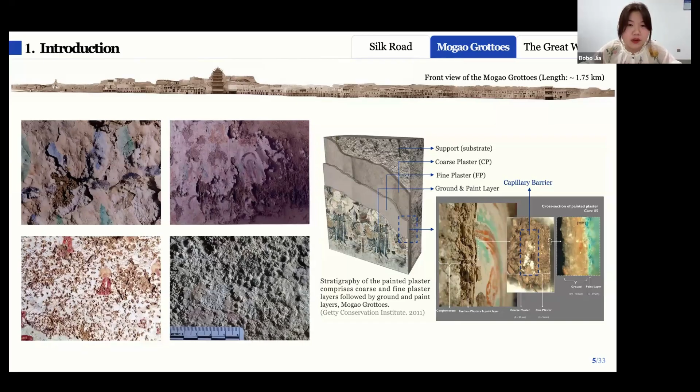As shown in the first row of figures, the surface becomes loose, which can lead to the detachment of the painting layer. Sodium chloride shows much smaller volume change. However, it is highly hygroscopic, meaning it can absorb moisture from the air, so it remains a serious threat to the paintings inside the caves. Here you can see the typical salt spots caused by sodium chloride.

And for the outdoor earthen heritage sites in this region, such as the Great Wall, salt deterioration also poses a serious threat. Here we can see the distribution of the Great Wall, which was listed as a UNESCO World Heritage Site in 1987. It extends for more than 21,000 kilometers along these red lines, crossing 3 main climate zones in China. It starts from the arid and semi-arid north, typical saline and alkaline regions in China and also my main research area, and extends to the more humid eastern regions.

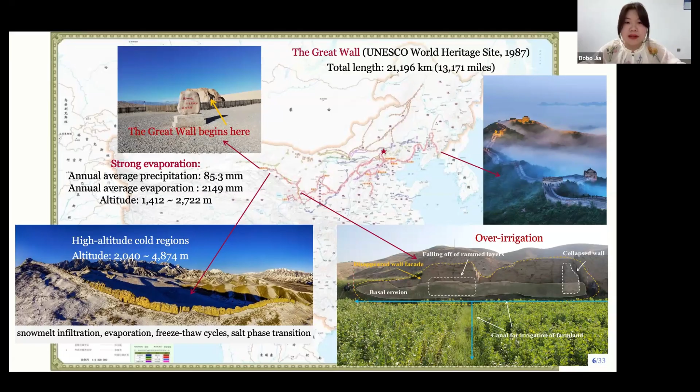And in some areas, the wall is surrounded by farmland. Why? Because to support the larger populations along the wide extent of the Great Wall, this situation is quite common. In some cases, over-irrigation occurs due to low rainfall and high evaporation. This further accelerates the upward migration and accumulation of salts from the foundation to the facades, leading to more severe basal erosion. So this slide shows a typical progressive deterioration.

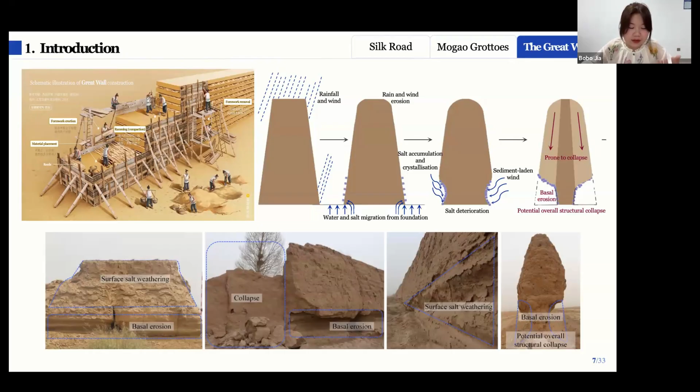Because the wall was built layer by layer, it is prone to detachment between layers, leading to basal erosion and even potential structural collapse. This process can become even more severe when combined with earthquakes or dynamic loading, such as vibrations induced by trains. And arriving at this point, we know that water and salt behavior within the pore structure of earthen heritage materials can progressively deteriorate the site.

So in my research, I try to understand this process from microstructure evolution to macroscopic behavior from a geotechnical perspective based on unsaturated soil mechanics. These figures show the soil water retention curve, SWRC, or some people also call it SWCC. Whatever, the SWRC describes the relationship between the water content of the soil and suction, or in other words, the capacity of the soil to retain water during drying.

So for an initially saturated soil, suction is low and mainly controlled by capillary effects. At the early stage of drying, the change in water content and suction is small. Once the suction reaches the air entry value, air starts to enter the pores to replace the water, and the water content decreases rapidly. This is the transition zone.

With further drying, the soil reaches the adsorption-dominated zone, where only a small amount of water remains, but suction becomes very high. And from the capillary theory, suction is related to the pore size. Smaller pores generate higher suction. So during drying, water in larger pores dries first, followed by smaller pores. So in this framework, what is the role of salts?

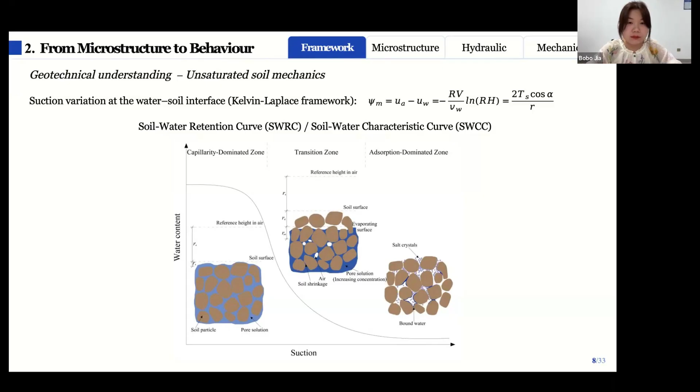And rather, when salts crystallize, they may act as a bonding agent, increase stiffness, or induce micro cracks depending on the conditions. So overall, water retention, volume change, and microstructure evolution together control the macroscopic behavior and mechanical properties of the material. So linking the microstructure to hydromechanical behavior is very important because it helps us better understand the deterioration process of these heritage soils, to build a reliable framework between the microstructure and the hydraulic behavior. Now we can move to the experimental part.

Since larger scale sampling from the heritage sites is not allowed, in this study, we used substitute soils from the Loess Plateau in northwestern China and Limon des Plateaux in northern France. These soils have geotechnical properties similar to those of the soils obtained by microsampling from a collapsed section of the Great Wall, so they can be considered as representative materials. And due to the COVID-related restrictions at that time, the main material used in section 2 was the loess from France, and the experiments were carried out at Laboratoire Navier.

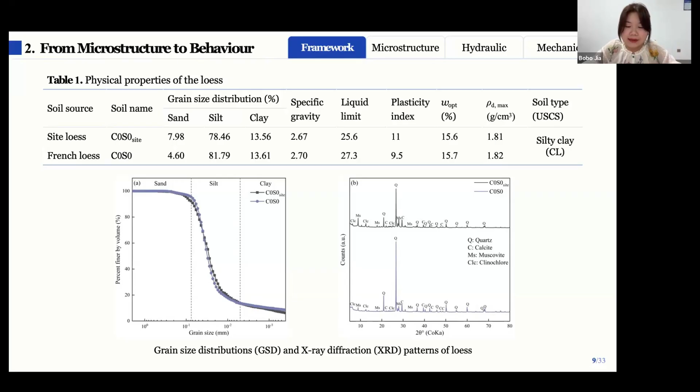And after the characterization, we concluded that both the reference soil and the tested soil are classified as low plasticity clay, that is CL in the USCS system. However, they are dominated by silt. So in practice, they can be described as silty clays. And now we can have an overall look at the experimental framework.

The samples were prepared using double-sided static compaction at a rate of 0.5 millimeter per minute. We obtained homogeneous specimens with a height of 20 millimeters and a diameter of 50 millimeters, a dry density of 1.565, and an initial water content of 17%. After preparation, different drying conditions were applied. For the microstructure analysis, we considered 2 drying modes and 5 salt conditions.

As mentioned before, clay shrinkage during soil drying can lead to microstructure evolution, but we aim to evaluate the effect of salt on the microstructure. So in the slow drying mode, the samples were placed on a suspended setup and dried under controlled temperature and humidity conditions for half an hour, then sealed for 3 hours before the next drying cycle.

And during each drying, the samples were inverted up and down to ensure more homogeneous drying. This process was repeated until the target water contents were reached, namely about 14, 11, 9, 7, 5, 4, 3. And based on the pretest, this range of the water contents can represent the soil water retention curve.

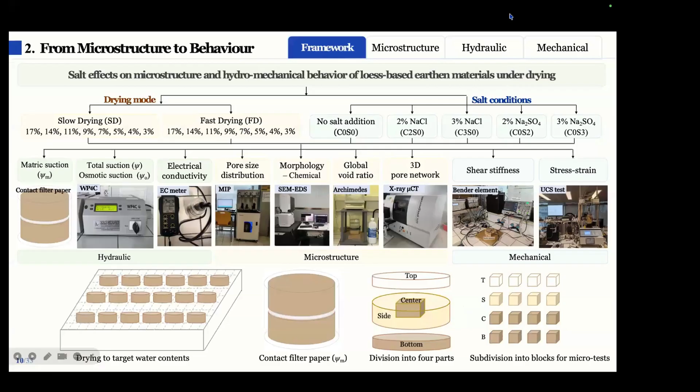So to make better use of the samples and to ensure that the micro, hydro, and mechanical data correspond to the same conditions, the test followed the procedures described below. And in addition, triplicate samples were prepared to ensure the reliability of the data and to control the experimental variations. And at each target water content, the samples were sealed with the filter paper and placed in a controlled cooling room for at least 2 weeks to achieve equilibrium.

At equilibrium, the soil and the filter paper share the same suction. Using a well-established relationship, the matric suction of the soil can then be determined. And the parallel samples were cut into 4 parts: top, bottom, sides, and center, and each part was further divided into small blocks of about 3 millimeters for subsequent

tests, including total suction measurements using a hygrometer based on the Kelvin equation, and the electrical conductivity to represent the salt distribution, and mercury intrusion porosimetry MIP for pore distribution, and SEM for the morphology and elemental analysis. And we also considered that some pores cannot be accessed by mercury intrusion, so the void ratio obtained from the MIP is theoretically smaller than the actual value.

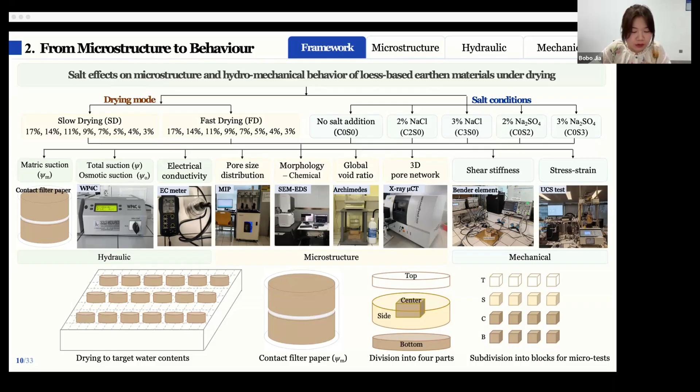And before moving to the microscale, we can have a look at the appearance of the samples to better understand the microscale phenomena. So the first row represents the samples after slow drying under different salt conditions, while the second row shows those after faster drying. Here, for example, SDC0S03 represents a sample under slow drying SD without salt C0S0 at a water content of 3%.

So from this comparison, we can see that under slow drying, the process is relatively homogeneous. When the water content reaches 3%, salt crystallization is present, but it remains relatively evenly distributed. And this is also supported by the EC values measured in different parts of the samples. And in contrast, under faster drying, significant crystallization occurs at the top surface of the samples. And in some cases, such as FDC3 and FDS3, detachment is already observed at the upper edge.

And we can also observe that under slow drying, the samples without salt and with low sulfate content dry the fastest, followed by those with higher sulfate or moderate salt content, while the samples with the highest sodium chloride content dry the slowest. This can be explained by the fact that salt solutions have a lower vapor pressure than pure water, making evaporation more difficult.

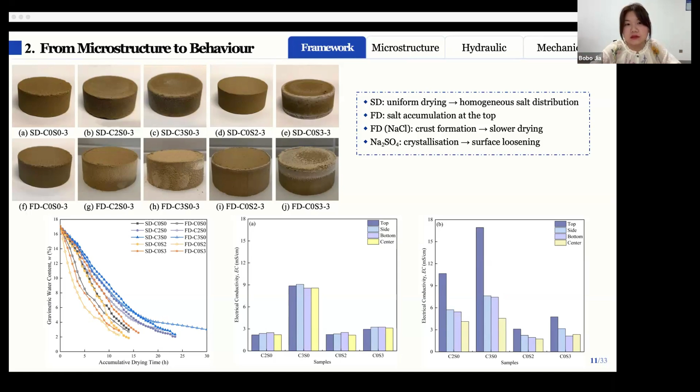So the comparison between fast and slow drying is relative. The slower drying of C3 under fast drying can be explained by the salt crust, and the crust partially forbids the evaporation. And from this point, we can move to the microstructure analysis.

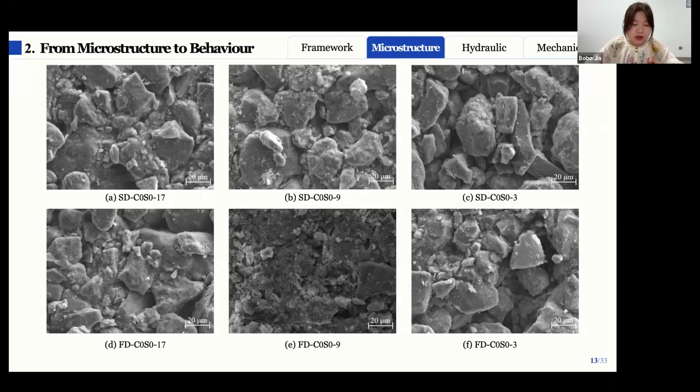And from now on, it's about the salt effect. In the following analysis, to better highlight the effects of salt and drying, only the results from the top part of the sample will be presented, because under slow drying, all parts of the samples show very similar PSD curves, while under fast drying, the top part is the most affected region during evaporation.

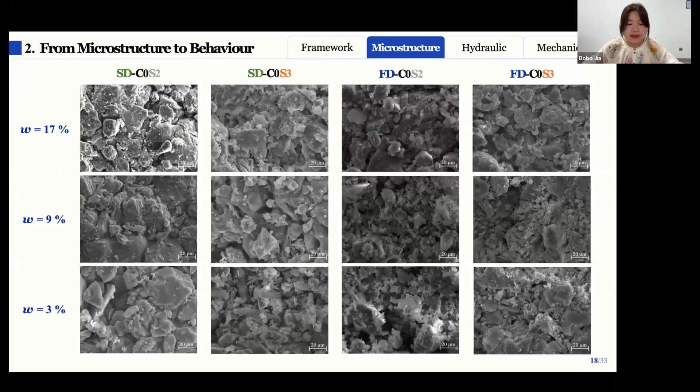Unlike sodium chloride, sodium sulfate tends to crystallize around its own nuclei, forming clusters of salt crystals that are unevenly distributed within the soils. So the crystals also expand more during crystallization, which can cause more noticeable damage to the soil structure. And if we look at the initial samples, we can see that the sample with higher sodium sulfate content, SDS3, appears more compact than SDS2. And for the faster drying condition, in the higher sodium sulfate content sample, the strong crystallization effect leads to the development of large suspended cracks between the soil particles.

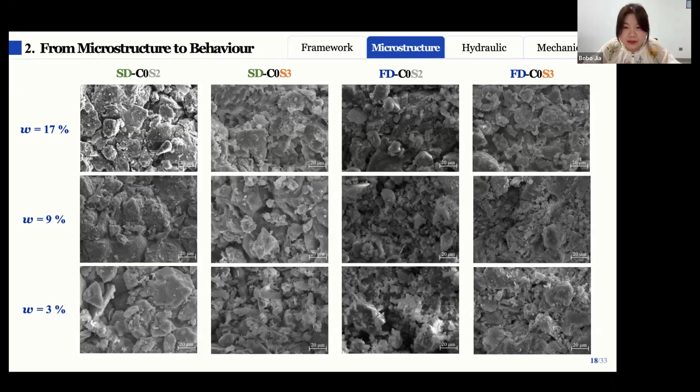And if we compare the two salts at the same water contents and the same concentration, sodium chloride shows a stronger effect on the water retention than sodium sulfate. This difference can be explained because the sodium sulfate solutions have a lower effective ionic concentration, and sodium sulfate exhibits a stronger hydration effect. It will influence how water is retained in the system.

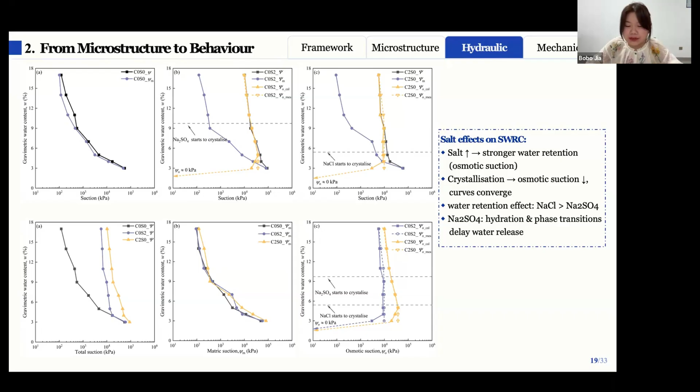And after crystallization begins, sodium chloride progressively precipitates, leading to a rapid decrease in osmotic suction. As a result, the behavior becomes increasingly controlled by matric suction. And consequently, at the later stage, the sample with higher sodium chloride shows lower water retention.

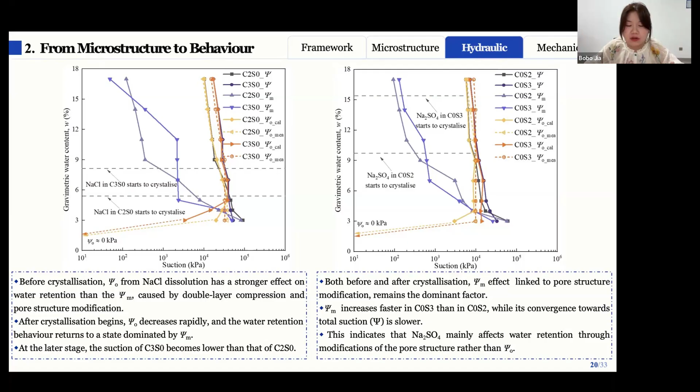And if we look at the right figure about sodium sulfate, different behavior occurs because both before and after crystallization, the matric suction plays a dominant role. The faster increase of matric suction in S3 compared to S2, together with its slower convergence towards the total suction, suggests that sodium sulfate crystallization significantly modifies the pore structure and affects the water redistribution.

So as a coupling of the pore size distribution and the hydraulic behavior, we can have a relationship between the pore structure and the soil water retention curves. So first, the Arya-Paris model, which links the grain size distribution to the soil water retention curve.

The basic idea is that we assume that the soil can be represented by an equivalent bundle of capillary tubes. And in this way, particle size is related to the pore size. And then using capillary theory, we can estimate the suction and reconstruct the SWRC from the grain size distribution.

And then the Laplace-Washburn relation, which is used together with mercury intrusion porosimetry, because in MIP, mercury is forced into the pores under pressure. Since mercury is a non-wetting fluid, the applied pressure is directly related to the pore size through capillary principles. So by measuring the pressure intrusion response, we obtain the pore size distribution and then convert it into suction using the same capillary relationship. In this way, we can also derive the SWRC from the pore size distribution.

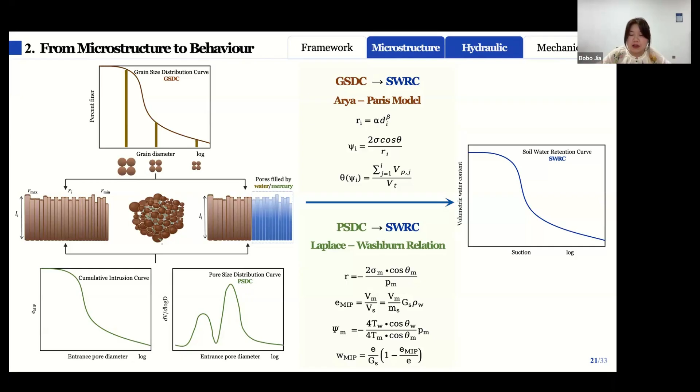So overall, these two approaches allow us to connect from grain scale to pore structure and then to hydraulic behavior. And this provides a quantitative bridge between the microstructure and the macroscopic behavior, which is the basis for the experimental arrangement. So with these approaches, we can bring the pore size distribution and SWRC together.

And at the early stage of drying, for samples containing soluble salts, high concentration salt solutions form more stable water films between soil particles; through the salt bridge effect they can enhance the interparticle bonding, leading to slower pore shrinkage and stronger water retention at the same water content. And as drying proceeds, the salt concentration increases until crystallization begins. At this stage, two main effects can be observed.

Firstly, salt crystals tend to fill larger pores, reducing the pore connectivity and limiting further water migration. At the same time, the remaining solution is drawn into the smaller pores when crystallization continues, leading to the partial filling or blockage of micropores. And then for sodium sulfate in particular, crystallization is associated with significant volumetric expansion. When this occurs in confined pores, it can generate local stresses and induce microcracks, which further modify both the pore structure and the pathways of water migration.

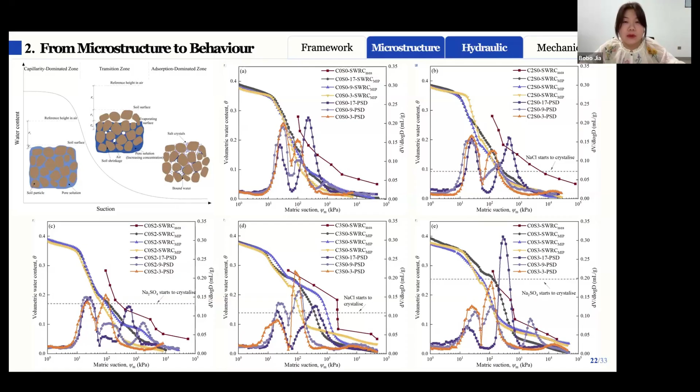And now we can have an analysis of the mechanical behavior. Before going to results, we have to know that the samples are prepared under very similar conditions, so we can mainly focus on the effects of suction and salt. And if we look at the evolution during drying, some points can be found. Firstly, as water content decreases, matric suction increases, which strengthens particle contacts and leads to an overall increase in Gmax. And before crystallization, osmotic suction and matric suction can work together to enhance the soil stiffness.

And after crystallization begins, the role of salt changes. It can either strengthen interparticle bonding through precipitation, or in some cases, induce local microcracks, which may weaken the structure. And the drying mode also plays a role, because under slow drying, salt precipitation is more uniform, which helps maintain interparticle bonding and preserve Gmax. In contrast, under faster drying, especially for the S3 sample, the top part becomes noticeably looser, leading to a lower Gmax compared to the other samples.

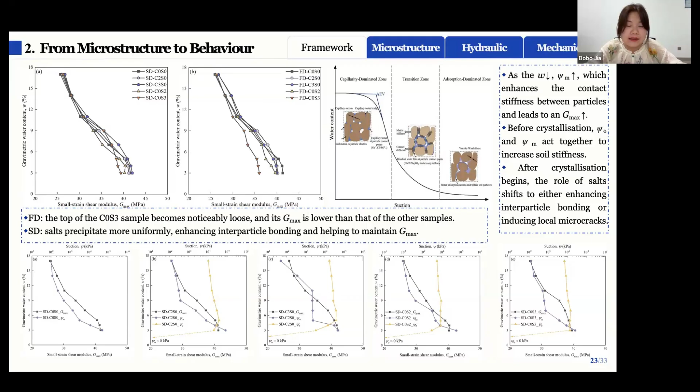And in terms of the unconfined compressive strength, before drying, the samples show relatively high plasticity due to the combined effect of matric and osmotic suction. After drying, both strength and brittleness increase significantly.

If we look at the influence of drying modes, differences appear. Under slow drying, salt precipitates more uniformly, which enhances interparticle bonding and increases the compressive strength. However, this also leads to a sharper stress drop at failure, meaning higher brittleness. And the effects also depend on the salt type and content.

For the C3 sample, the salt crust at the top promotes interface-controlled failure and results in higher brittleness. In contrast, for the S3 sample, the top structure is looser, which can locally buffer the stress. This leads to lower brittleness, but also a reduction in compressive strength.

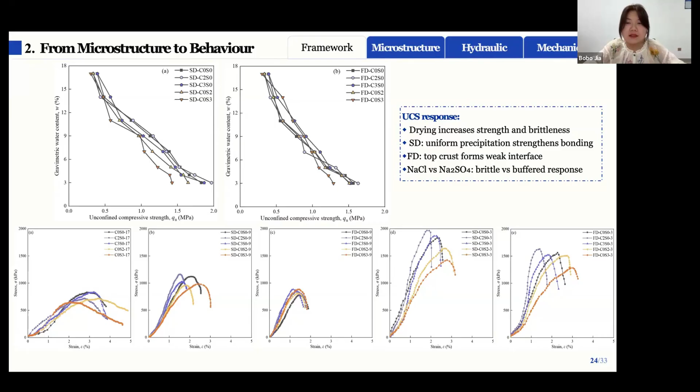So how can we apply this understanding to mitigate the salt damage in earthen sites? The key idea is to regulate water and salt redistribution by modifying the pore structure of repair materials. We can take the Great Wall as an example, because in many cases, irrigation water transports salts from the foundation into the wall, accelerating the basal erosion.

To stabilize the structure, rammed repair soils are commonly used. However, these repair materials often have different properties from the original soil, leading to poor compatibility. In some cases, they are even much stronger than the original material, which can result in detachment. And the difference in microstructure at the interface can promote salt accumulation, further accelerating damage.

So the question is, instead of focusing only on strength, can we better control the capillary behavior of the materials? This leads to the idea of applying a capillary barrier system, which is widely used in environmental geotechnics, but rarely considered in heritage conservation.

As shown in the diagram, when water moves from a fine layer to a coarse layer, the capillary entry pressure of the coarse layer is higher. As a result, water cannot easily enter the coarse layer and tends to accumulate above the interface. In contrast, when water moves from the coarse layer to the fine layer, the fine layer has a higher water retention capacity, which promotes water migration. This can be seen in capillary pumping.

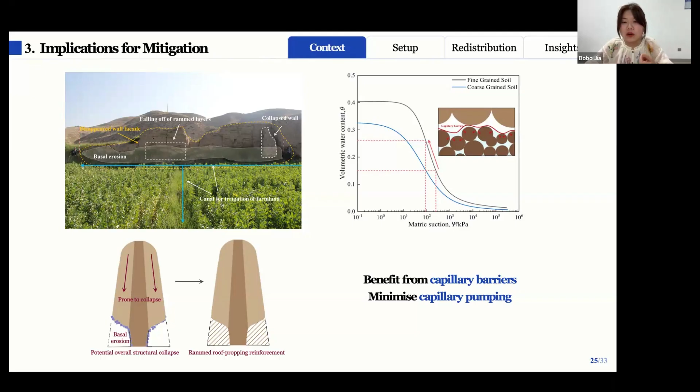So based on this, if the repair soil is designed to be coarser than the original soil, it can act as a capillary barrier. During evaporation, this limits upward water migration and therefore reduces the transport of dissolved salts. On the other hand, if the repair material is finer, it may enhance capillary pumping and accelerate water and salt movements. So the main idea is to use capillary barriers to limit water and salt transport while avoiding configurations that promote capillary pumping.

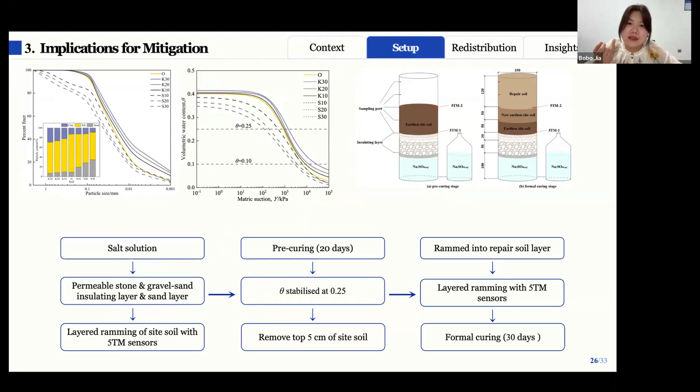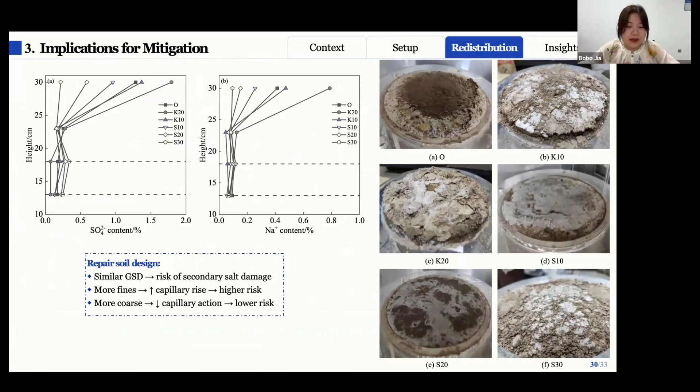Here we can explore whether the capillary barrier concept can be used to reduce salt damage in earthen heritage, because in reality, the surface water content of the ground is usually around 0.1 and can reach about 0.25 during irrigation. So the key question is whether water can cross the interface between the original soil and the repair layer under these conditions.

For the fine over coarse structure, when the soil water content is below 0.25, water and salt can still pass through the interface. This means capillary pumping occurs, and it may turn into upward migration. In contrast, for the S group, with coarse over fine structures, the critical water content is much higher than 0.25. This means the capillary barrier is most effective, thus limiting the upward movement of water and salt.

We can also get an example from reality, because the field observation reported by Cui showed that a specific soil layer exists at the base of the Great Wall in Qinghai province. This layer lacks effective capillary pore structures and therefore does not provide pathways for salt migration from the foundation to the wall. As a result, this section of the wall has not developed significant salt damage over several centuries of exposure.

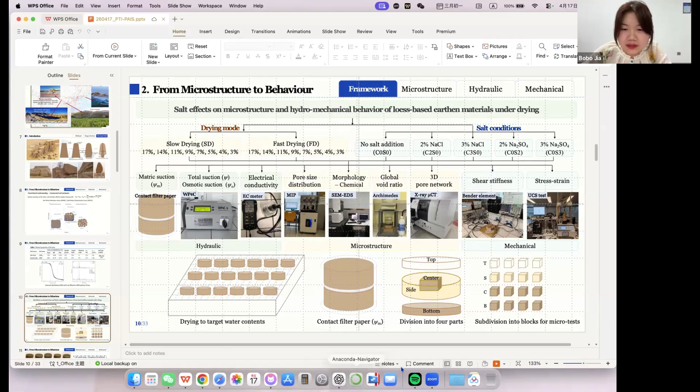Yeah, okay, like this. It can be ensured in that way. Yes, and I didn't use crystallization modifiers for heritage preservation. I know this idea, but I haven't done this before. I cannot use my cursor, but there's a second question.

And the third one: beyond this presentation, here I only have salt contents of 2% and 3%. Before, I had another series of tests with salt contents of 0, 0.2, 0.4, 0.6, 0.8, and then 2%. My results show that sodium chloride at about 0.4% can act as a bonding, like a cementation, which can enhance the mechanical properties of the sample. Beyond this content, its crystallization may destroy the sample. For sodium sulfate, Na2SO4, maybe the threshold is 0.4%. I mean, a little bit of salt is good for the soil, but beyond this threshold, it will damage the soil.

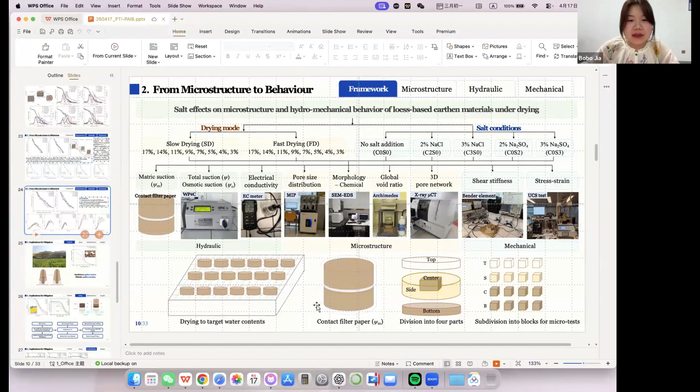Also, Cristina Cabello would like to know if there is any suggestion about how the barrier would be implemented on site. My implementation of the capillary barrier may be somewhat specific to the Great Wall. My capillary barrier is set here during the reinforcement.

Is there a problem in my connection? No, I think it's general. We lost her. The Zoom from US is not very friendly to China.